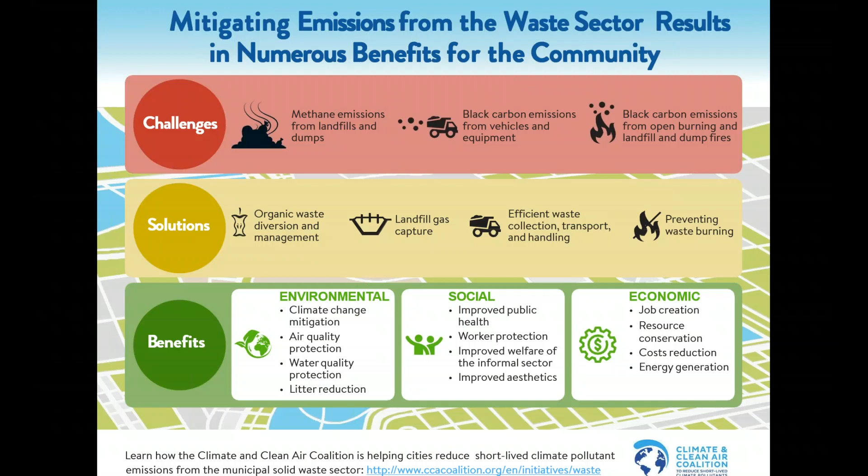One of the solutions is the diversion of waste from landfills, particularly organic waste. Organic waste can be treated to create compost or energy through anaerobic digestion. For other types of materials that cannot be recovered, waste to energy might be one way of treating them. This webinar will discuss how waste to energy fits into the circular economy and can help municipalities deal with some residuals.

Before we get started, I'd like to introduce our presenter today, Engineer Carsten Spohn. Carsten Spohn is the Managing Director of Interessengemeinschaft der thermischen Abfallbehandlungsanlagen in Deutschland, also known as ITAD. In English, the German Association of Waste-to-Energy Plants. Since 2007, ITAD represents nearly 100% of German municipal solid waste incinerators, as well as sewage sludge incinerators and refuse-derived fuel incinerators.

In this role, he is Deputy President of the Confederation of European Waste-to-Energy Plants, also known as CEWEP, and member of several CEWEP working groups. At the European level, he represents CEWEP as a member of the European Integrated Pollution Prevention and Control Bureau technical groups for the review of the best available techniques reference documents for waste incineration and for waste treatment, and is chair of CEWEP's working group Residues.

At the German level, he is a member of several working groups of the Association of German Engineers, including Working Group 3460, Emission Control, Thermal Treatment of Waste, and the National Expert Working Group KS25, Implementation of Seveso III Directive, Major Accident Directive for the waste sector. He has also presented the subject area waste to energy primarily at German and European conferences.

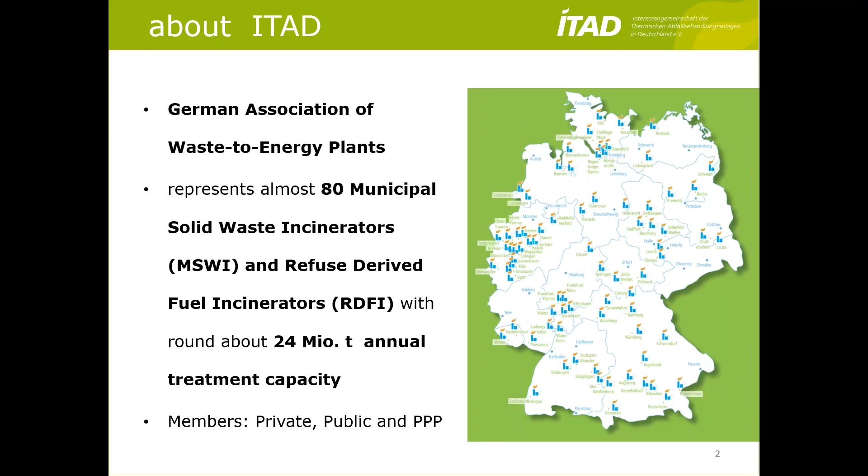There we go. Okay. Sandra already said, what is ITAD? The short introduction. We are the German Association of Waste to Energy Plants, representing around 80 municipal solid waste incinerators and refuse-derived fuel incinerators, and our annual treatment capacity is around 24 million tons. Our members are private, public, and public-private partnership companies and owners. So we represent the whole sector more or less in Germany.

So when we start to talk about waste to energy, we have to look back first to the history and maybe summarize a little bit the tasks and aims of waste to energy. So history, look back. In the Bible, incineration is already mentioned. Waste incineration in open fires around 1000 BC in Jerusalem.

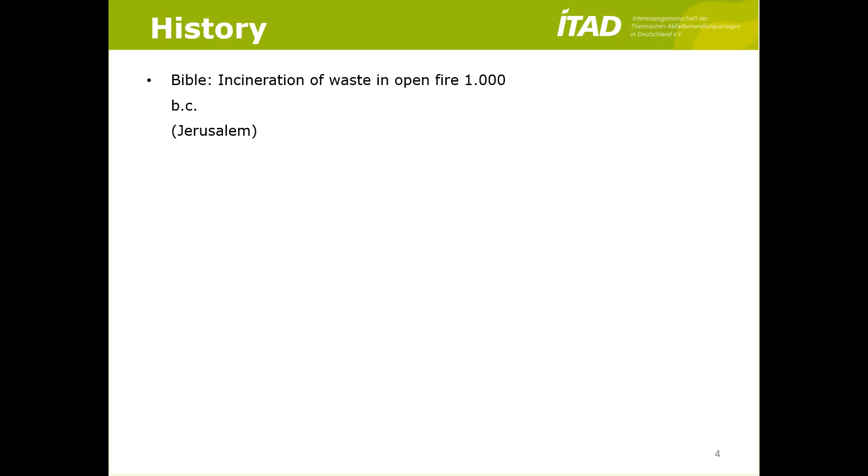And if I'm right, I remember the Old Testament already says they burned the rubbish at the banks of the Euphrates and Tigris River. So you see, waste incineration has a real long history. In the Roman Empire, the Romans also incinerated the waste. But after the downfall of the Roman Empire, waste incineration fell into oblivion.

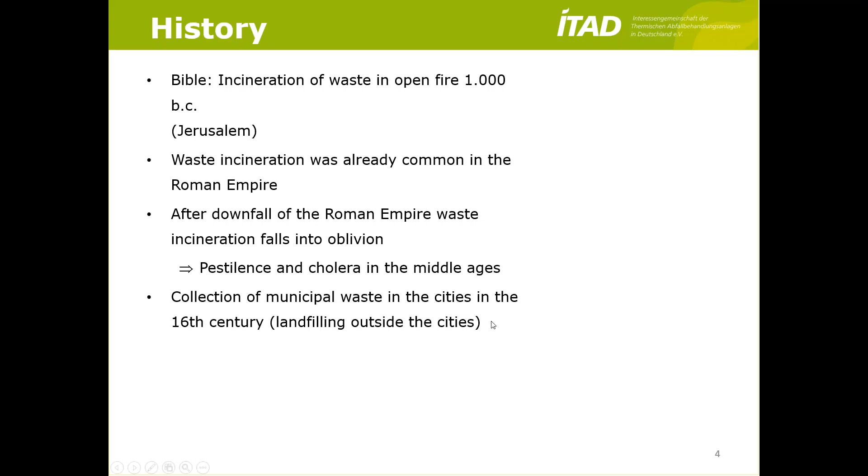And one of the results was that horrible diseases like pestilence and cholera in the Middle Ages came over Europe. So in the 16th century, the cities decided to collect the waste and to landfill it outside of the cities or use it as a compost, which was not a very good idea because they couldn't get rid of the rats and the diseases as well.

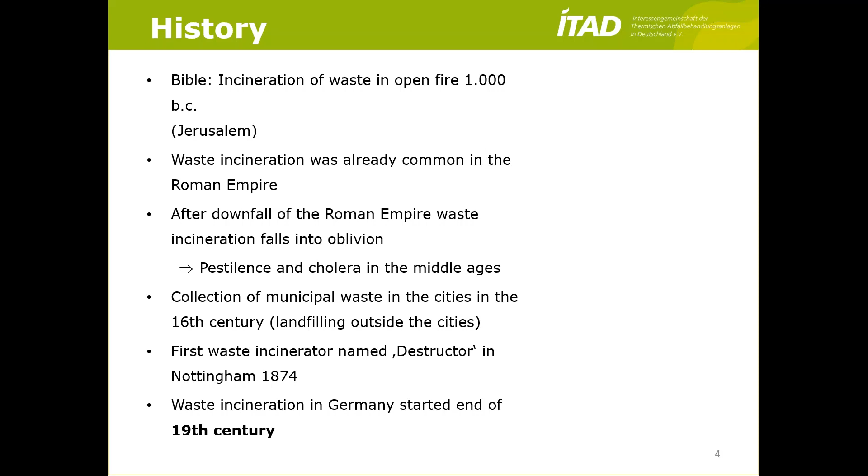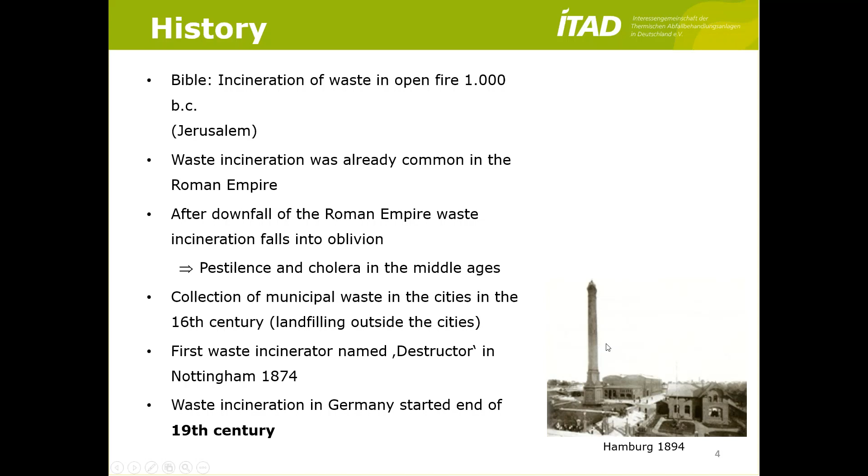And the first incinerator, with the lovely name Destructor, was built in 1874 in Nottingham, and that was the start of a more technical waste incineration, not in open fires anymore. And the first incinerator in Germany was built at the end of the 19th century, 1894 in Hamburg, with the beautiful name Bullerdeich. You see here the picture of that waste incineration plant already with the stack on the left side.

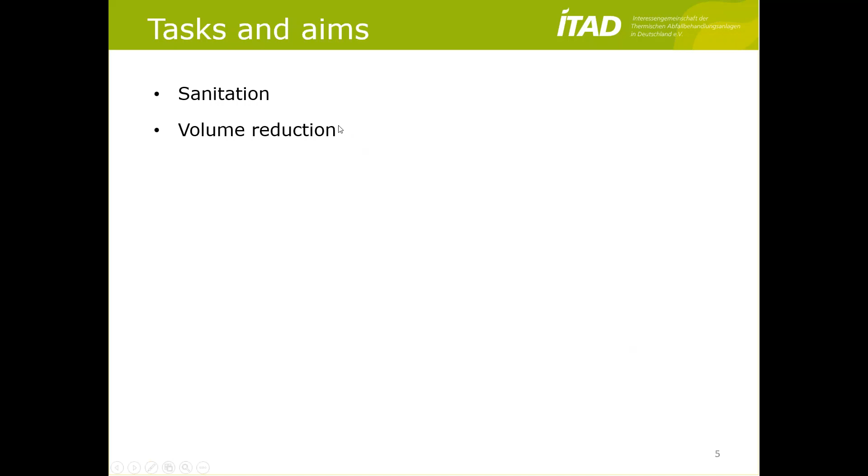What are the tasks and aims of waste to energy? Of course, sanitation. Volume reduction. People wouldn't use the landscape around the cities for landfills anymore. The long-run elimination of pollutants from the cycle of materials, a point that becomes more and more important when we're talking about increasing our recycled materials and circular economy. The minimization of emissions, clean air.

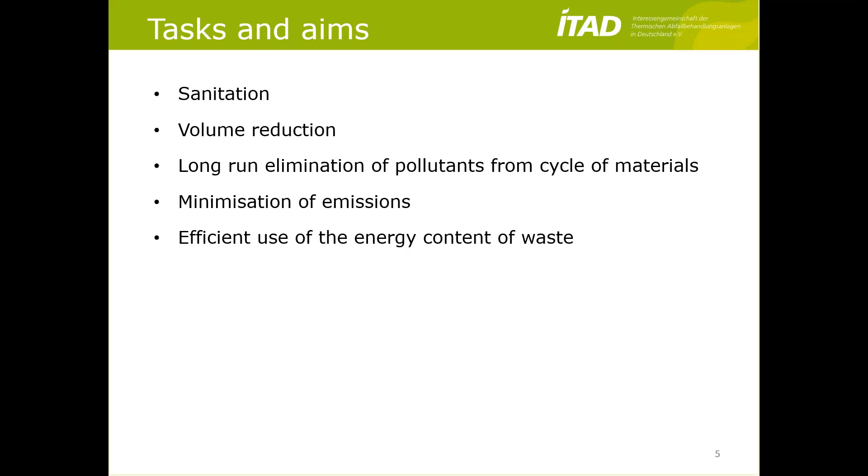Efficient use of the energy content of the waste, that is also to see in connection with the climate change and the CO2 saving potential. Substituting fossil fuels is an important point, and also the contribution to a sustainable waste management through the recovery of, e.g., the metals from bottom ash, or the reuse of bottom ash as secondary raw material used in road construction applications, noise protection walls, etc.

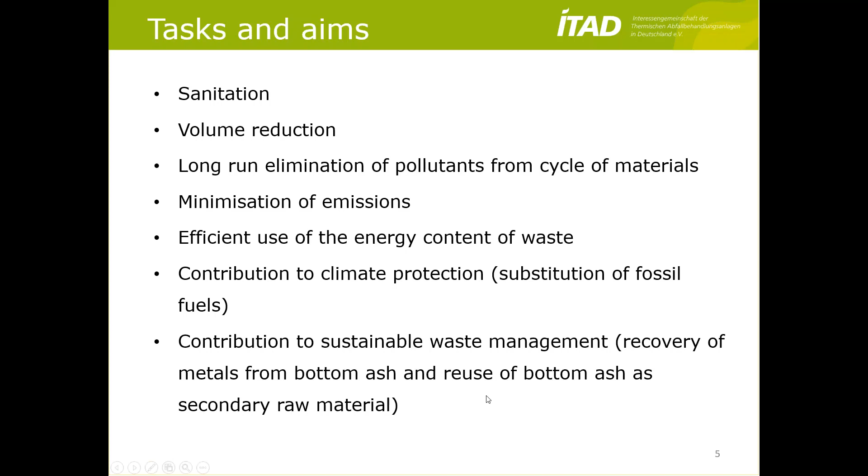How does it work? Well, here you can see the general principle, the setup of a typical waste to energy plant. You have a waste delivery and storage area. The middle part is the incineration, steam generating part. Then you have the energy recovery part, the boiler and the turbine set and generator. And then most often the biggest part of the plant, the flue gas cleaning system, or I prefer the air pollution control system.

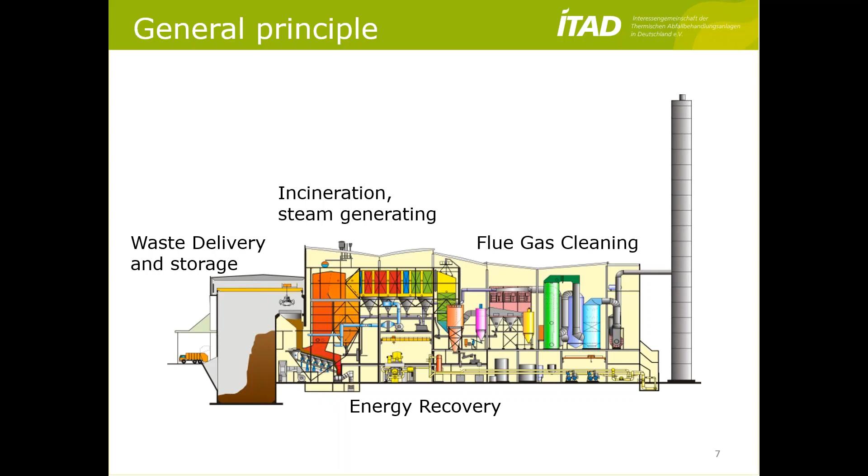Let's take a more detailed look at the incineration here with the waste storage area and the combustion chamber. This is a picture from my old plant of the waste delivery hall. You can see the trucks. We try to keep it clean to make it a nicer place, and not this typical dirty place most people think waste to energy plants are.

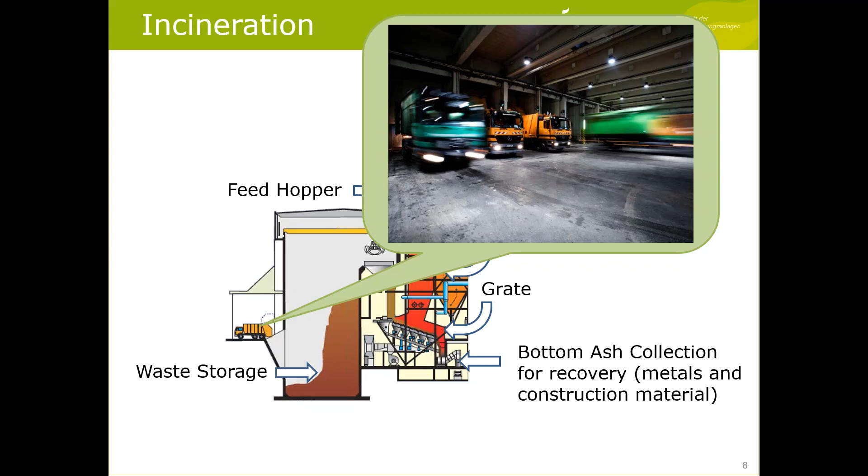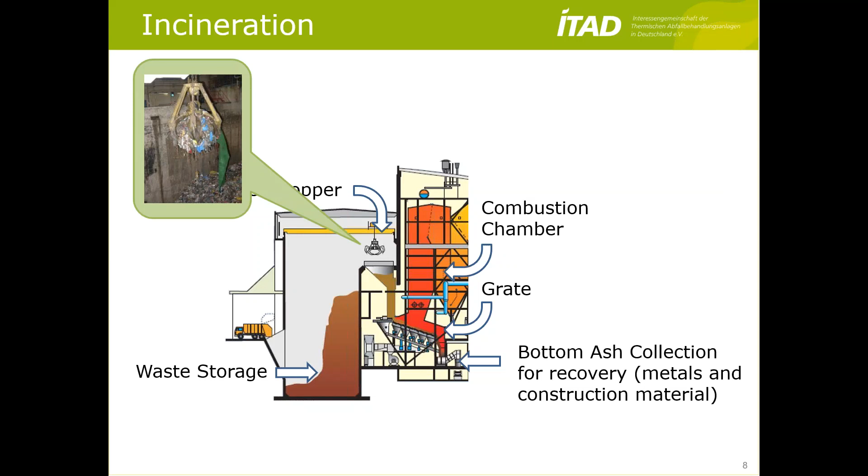Then we have, of course, the waste bunker, the storage with the cranes feeding the combustion chamber. And then you have the combustion chamber here, picture of a look through a little window on the grate. And important for the waste incineration, of course, is the input, although you cannot always see what is in. If you have the municipal dustbin, you never know what exactly is in the dustbin, but we have to define some rules about the input.

Of course, municipal waste and similar commercial waste is suitable for that. Bulky waste from households may be crushed before incineration. Demolition and construction waste, non-mineral waste, of course. Non-recyclable packaging waste. We all know that we can recycle a lot today, but there are also a lot of compound materials where the efforts we have to spend for recycling are so high that this is not really suitable at the moment for recycling.

We have sorting residues from commercial waste, but also from municipal waste, from MBTs and composting plants, all the impurities. What is not acceptable, a very important part: soil, concrete, asbestos, sand and stone, free-flowing sludges, that is not suitable for grate incineration. Bulky metal waste is not, well, metals do not burn. Self-igniting and explosive or highly flammable waste, radioactive or infectious waste.

And the most important thing, and a problem in many, many countries I visited before, is that the input is not free of non-combustible waste, and especially very wet waste, wet organic waste with a low NCV, net calorific value.

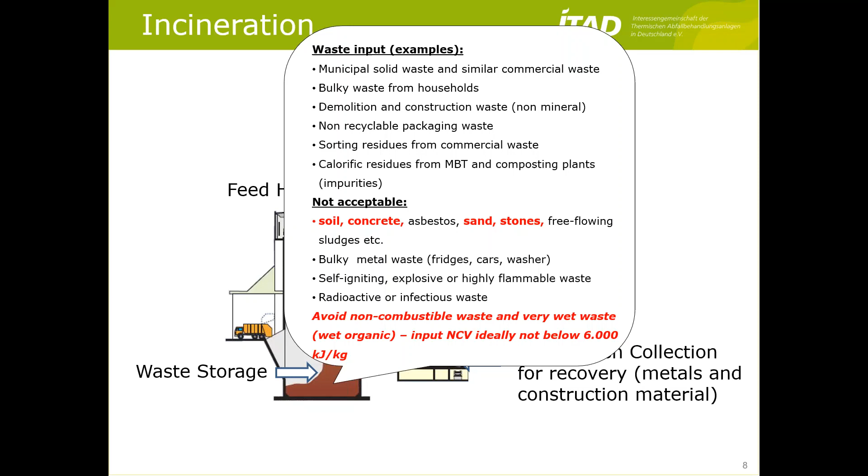Ideally, it should not be below 6,000 kilojoules per kilogram, because then you have to spend too much energy for drying or for evaporating the water content of the waste. And an old saying of a friend of mine who is the managing director of the composting organization in Germany is that potato soup doesn't burn. And I think that shows very clearly what waste to energy can incinerate and what not.

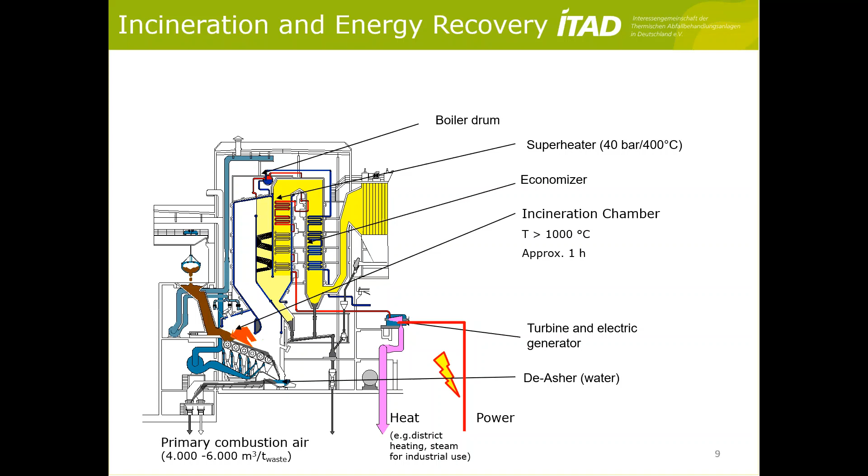And you can produce steam with standard parameters of 40 bars and 400 degrees centigrade. And after that, we can use that live steam in the turbine and generator set to produce power, or if you have an extraction condensing turbine, you can also extract heat, for example, for district heating or for industrial use. But we will see later that the options to get rid of that heat, to sell that heat, to use that heat is a quite important topic for waste to energy plants all over the world.

So the quick facts in summary: grate combustion is, from my point of view, the most proven and widely applied method to treat residual waste and recover its energy. Organic compounds contained in residual waste are safely destroyed. That's one of the tasks. The bottom ash left after incineration can be recovered. We will see later. And also the metals embedded in the residual waste can be recovered from the bottom ashes. Important task too in terms of sustainability.

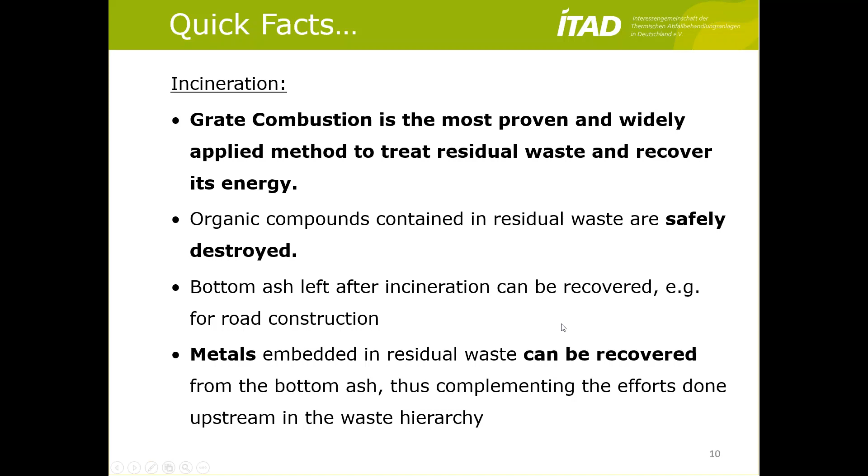Quick facts about the energy recovery. Energy from waste plants can recover more than 90% of the energy embedded in the waste input. The electricity is generated around the clock, 24 hours a day, not really 365 days a year, because we need some time to maintain the plant. So between 6 and 8 weeks, the plants are shut down for maintenance. And it's, thanks to the renewable part of the waste, a green energy or partly green energy that contributes to climate protection.

The heat recovered by a plant can be used for district heating or district cooling, although at the moment it's too expensive. We have to find better ways to use the heat to produce cooling. Industrial processes, and a very interesting thing, especially for islands or countries near to the desert, is the water desalination. We all know that water is one of the important topics worldwide.

And for example, we have a very little waste to energy plant in the Caribbean, Saint Bartholomew, where we produce with a little amount of waste, around about 12 or 13,000 tons a year only, very good quality potable water. So there are many other purposes for energy use of waste to energy plants, but we have to find the right place for those plants worldwide.

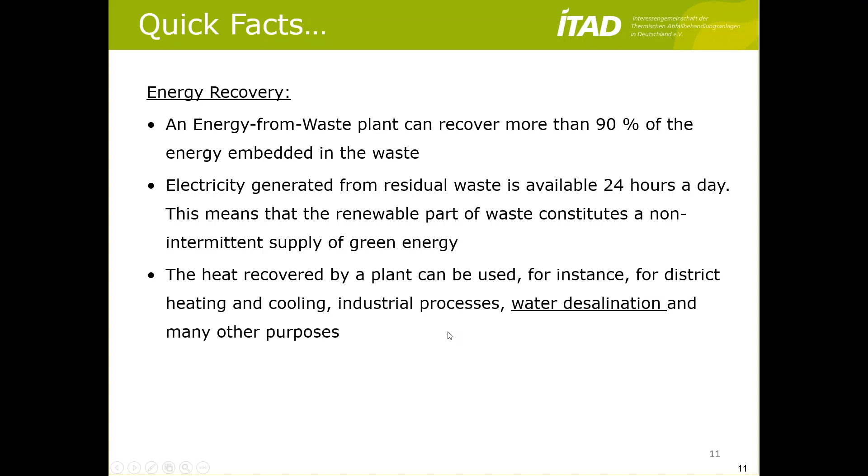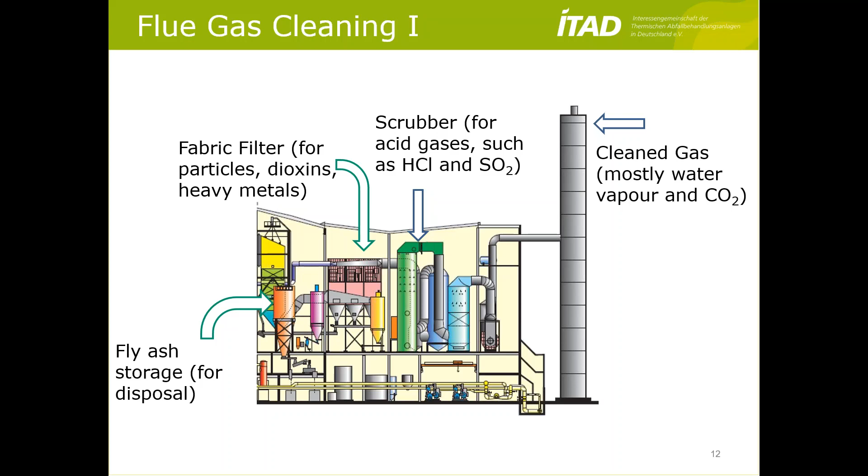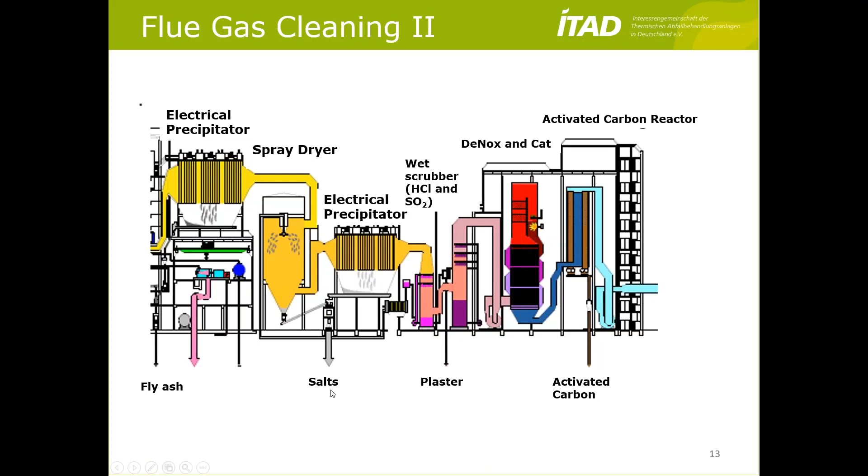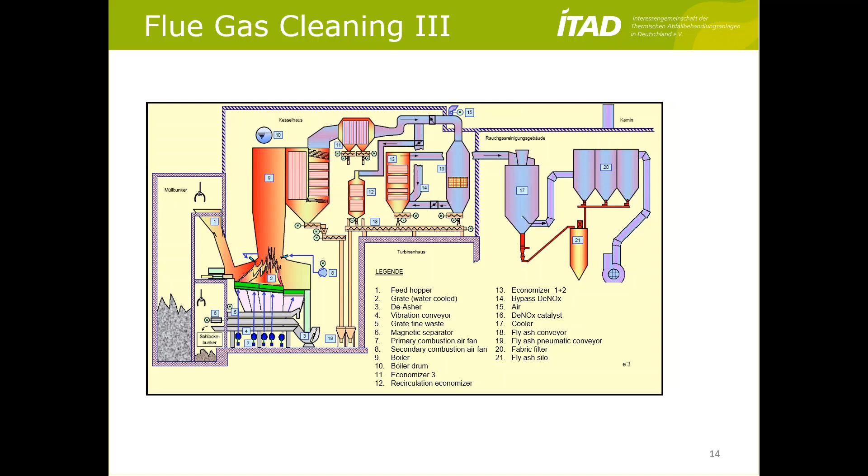So flue gas cleaning, a quick overview about different setups, small setups or more compact setups like this one here, or a very comprehensive setup with a lot of aggregates, with a lot of treatment steps of the flue gas cleaning or air pollution control with the residues produced here. And another setup, a bit simpler one, but as efficient as the other ones. And they all together produce a very similar set of emissions. And this set of emissions is set here.

You can see the pollutants in the left row. You see the German limits from our ordinance on the emissions of waste incineration plants, and you see the operational data as an average of the half-hourly average values. And in the graph below, you can see the percentage of the ELV used on an annual basis, and you see that most of the parameters are used only 20% or less, significantly less than 20% of the emission limit values.

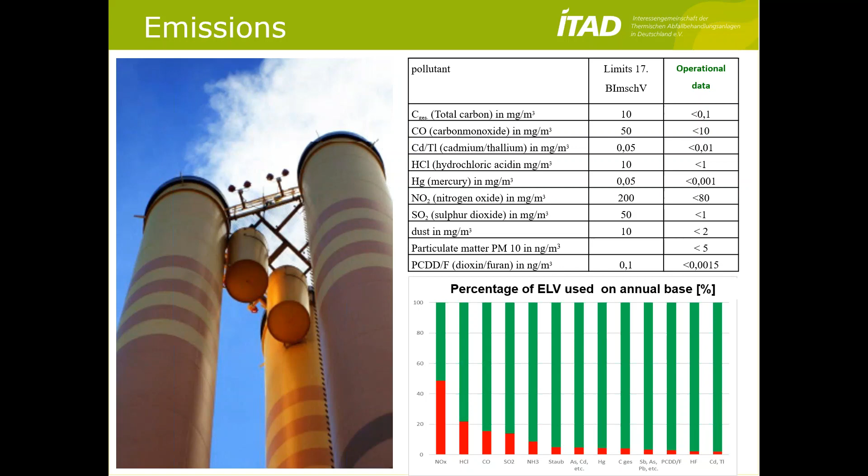The only exemption is the NOx, which can be influenced by the flue gas cleaning system itself. If you have a catalyst, the DeNOx system, it depends on the urea you insert into the flue gas stream to influence that value. So, quick facts about the flue gas cleaning system. Emission limits for waste to energy ones are the most stringent in Europe from the whole combustion industry, and the emissions are more or less irrelevant compared to other sources.

That's also what one of our ministers for the environment said, and he was a green minister from the Green Party, and we made a study in 2005, and as dioxins and furans were many years in the public discussion, he said dioxins emitted from waste to energy plants are not an issue anymore.

So we have mandatory technology for heavy metal removal, and that guarantees, especially for mercury, which is also in the focus of the Minamata protocol, a safe removal from the ecocycle, safe storage, for example, in hazardous landfills. We will see that if we come to the residues from waste to energy plants.

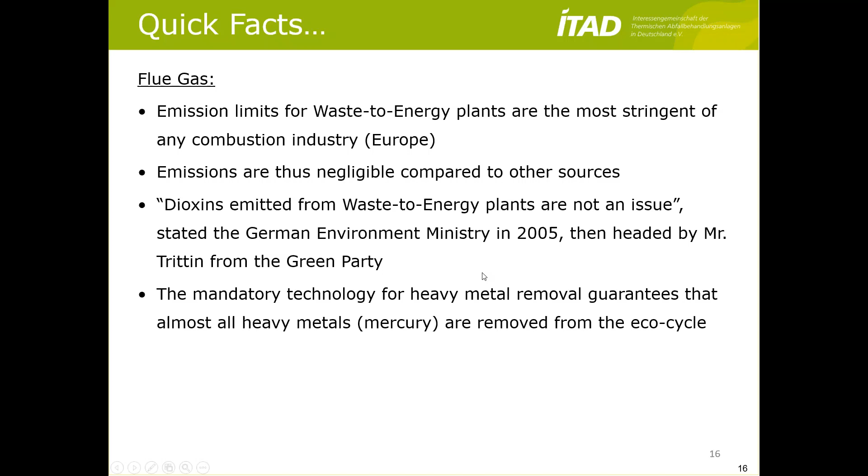There we go. Here are the residues in a quick overview. Again, I don't want to go too deep into the details, but we can see that from 1 ton of waste, we produce round about 400 kilograms of residues. Most of it are the bottom ashes, 200, 220, 250 kilograms in Germany, depending on the waste input composition, some boiler ash, some solid APC, air pollution control residues.

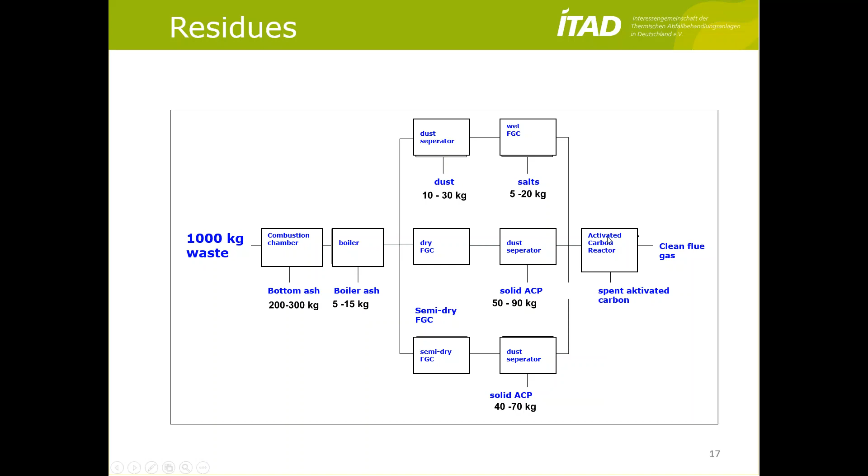Sorry for that mistyping. Sometimes you have a kind of police filter at the end of the APC, which is fed with activated carbon. So what can we do? We have, at least in Germany, a very safe disposal and recovery of the APC residues and the bottom ash in an environmentally sound way. For example, we use the APCs to stabilize our salt mines.

On the other hand, other European countries have dedicated hazardous landfill sites where they landfill the stabilized residues from waste incineration. We separate and recover the metals from the bottom ashes. Almost 1% of our recycling rate in Germany comes from the metals recycled from bottom ashes. And also the mineral part of the bottom ashes can be used as secondary raw material.

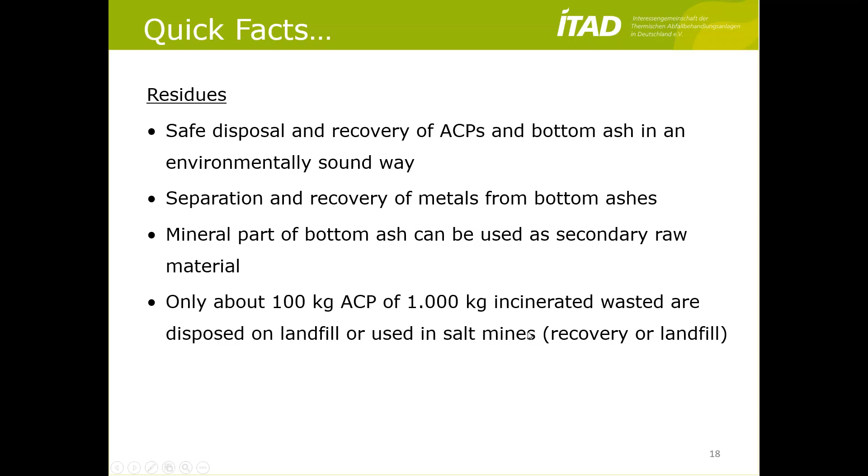Yes, only 100 kilograms of the residues are landfilled. That's what I said before. And as we have these salt mines that have to be stabilized, it's also classified as recovery, but that's a specific issue in Germany.

So when we talk about waste to energy, of course, we also have to talk about economic key data. I would say that the economic efficiency depends, of course, on the capacity, and the minimum of 50,000 tons per year should guarantee a kind of economic efficiency. But as I said before, in very specific conditions, e.g. on a small island with the need for water desalination, that can be also less than 50,000 tons. The technology installed is quite important.

The infrastructural requirements: near to the waste production, to the cities, not the old German strategy, build it far away from the city because people don't want to see an ugly waste to energy plant. That was one of the mistakes we made in Germany, and now we sometimes have the problem to connect waste to energy plants to the heat grid. With the power, it's not a major problem, but with the heat, it could be quite problematic and quite cost intensive. You need a logistic connection for trucks, railway, maybe ship, depending where you are.

Near to energy consumers, you need a sufficient supply of waste, of course, without overcapacity, something that was discussed very intensively in Germany. And you can believe me, with 24, 25 million tons of capacity, of course, the recycling industry claims that waste to energy possibly can hamper recycling. But that's a topic for the second part of the presentation.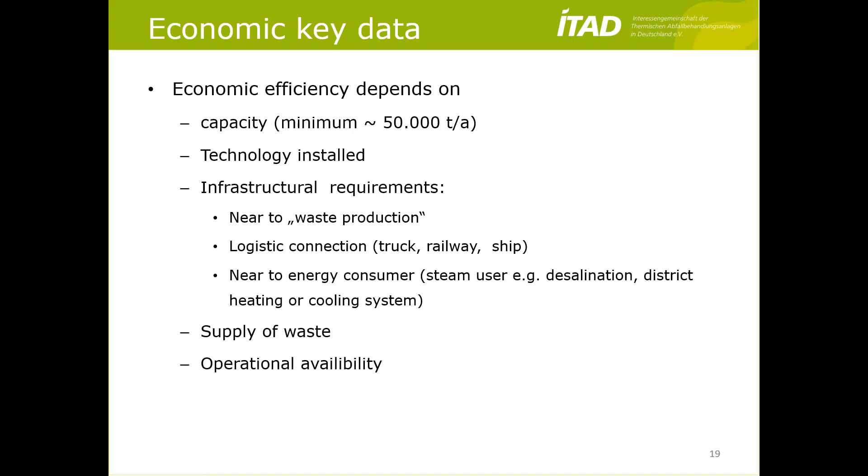So here are some basic conditions, just roughly for you. You can check that afterwards, and also compared costs for building, investment costs. In Europe, per ton of waste, 500 to 650, let me say for state-of-the-art new waste to energy plants, considering 15 to 20 years in operation. Worldwide, I'm fully aware that the cost can differ significantly. I was in India, for example, where I see that the investment costs are at the lower end, maybe 100 to 150 euros per ton of annual capacity. So these costs have to be calculated very specifically for the country you want to build the waste to energy plant.

You have maintenance costs, which are more or less between 3 and 5% of your investment costs. Not to forget treatment costs, but these treatment costs also vary with the salary in your country, with the treatment costs or landfill costs for the residues, with your feed-in tariffs for power. So it's very difficult to give here a clear number or a range of the treatment costs, but they are there.

It's not for free, that's clear. You need maybe 40 to 60 employees for a big waste to energy plant. That's if you have a more or less automatic control system. I saw waste to energy plants in India and also in China which have significantly more employees than these 40 to 60. You need space for a waste to energy plant, and a rough estimation for a big waste to energy plant for 5 lines with 150,000 tons of annual capacity, it's maybe 80,000 square meters.

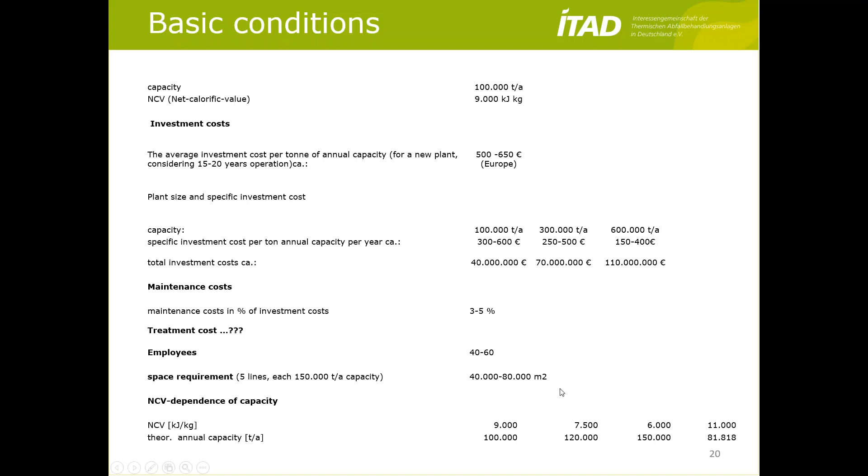And also the net calorific value will influence your capacity. With a low calorific value of, for example, 7,500 or 6,000 kilojoules per kilogram, a 100,000 tons at 9,000 kilojoules per kilogram plant will have significantly more capacity. It's 120,000 tons, because the limit is always the energy input in your incineration chamber, in your combustion chamber. So if the net calorific value is lower, the capacity will increase. If the net calorific value increases, your capacity will decrease. That's for sure. That's a thermodynamic rule, and waste to energy plants have to follow that rule, of course.

But the important message from this slide is that zero gate fee, which I really hear quite often, is really a myth. Of course, there are countries where the feed-in tariffs for power are so high, with some subsidies in the background, that at the end of the day they can compensate the costs of treatment, but then it's a zero gate fee subsidized by other things. But waste to energy costs money, that is clear, and that is a message that has to be told to people outside a waste to energy plant.

I remember some municipalities, for example in India again, where we had very hard discussions about the zero gate fee policy, and we compared it a little bit to wastewater treatment in India, where at the beginning it was almost impossible to introduce a treatment fee for wastewater, but today there are treatment fees paid by the municipalities, and maybe that's the way we can deal with the gate fees for a proper waste to energy plant.

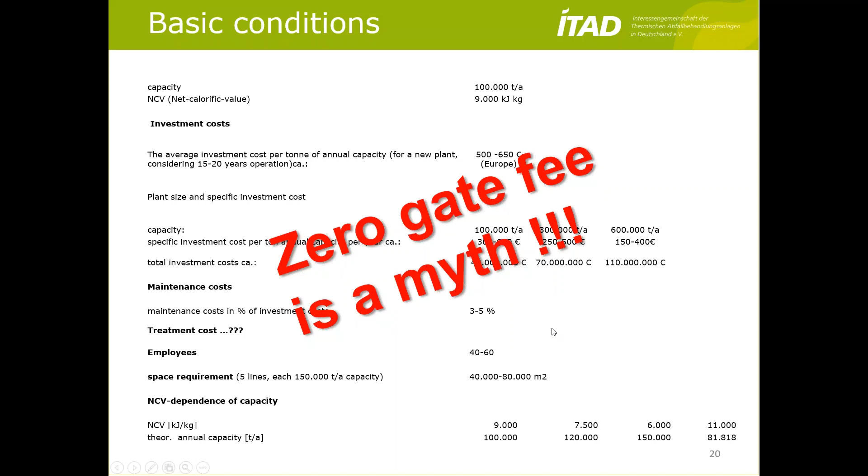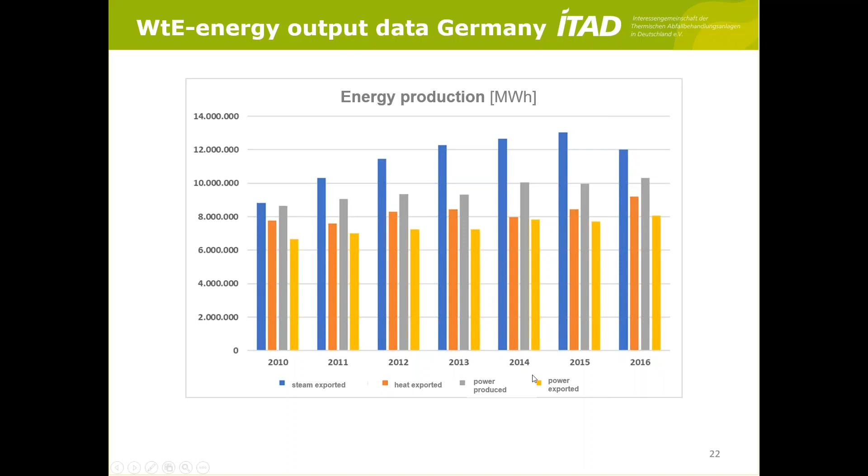So energy efficiency and climate protection potential, that's the second aim of the Climate and Clean Air Coalition, climate protection. This is, for example, the energy production in Germany. You see it differs a little bit between heat and power, depending on how much heat you can sell and how warm or cold the winter was, but the total energy produced in Germany in the last years has increased a little bit.

And if we calculate the greenhouse gas savings from that, you see, of course, there is a burden. 1 ton of waste creates 1 ton of CO2. Roughly half of it, or less than half of it, is fossil content. So at the end of the day, the specific emissions are almost 400 kilograms per ton of waste. So 9 million tons on the burden side. But you also generate credits.

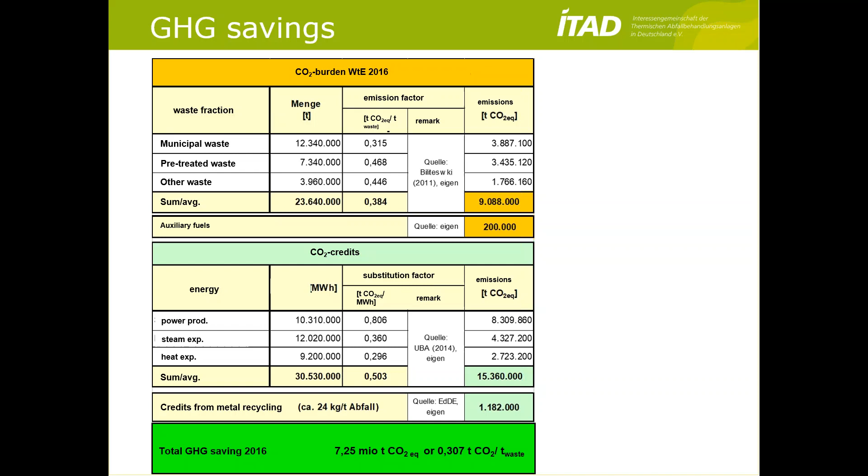In Germany, we still have some coal-fired and gas-fired power plants, and if you calculate the CO2 credits using the substitution factors, you see that at the end of the day the German waste to energy sector saves 7.25 million tons of CO2 just by substituting fossil energy sources in our country. This is quite a lot, but not as much as we save in another direction. Sorry, I missed that.

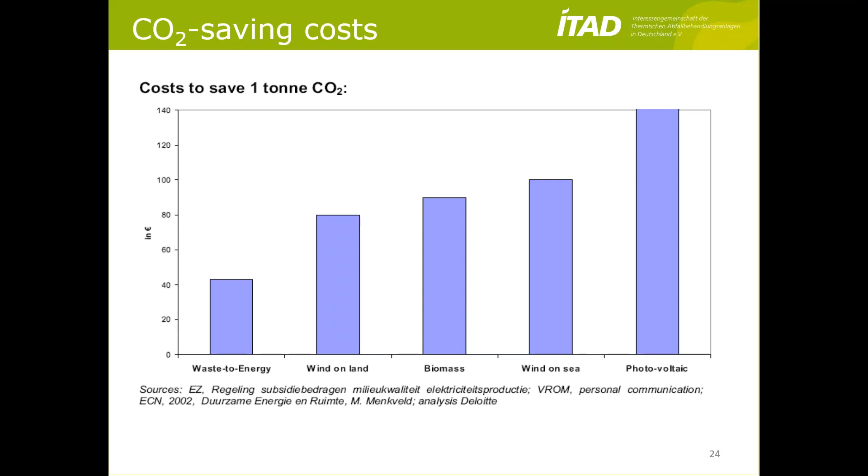We also calculated, and not only we, it's coming from the Dutch Ministry of the Environment. We compared the specific costs for saving 1 ton of carbon dioxide, and you see that waste to energy has by far the lowest specific CO2 saving costs. But another point is quite important. That's what Sandra said in her introduction.

If you want to get rid of your landfill and replace it with an efficient waste to energy plant, you can see that the amount of CO2 emissions you can save, from methane, which is 25 times more dangerous for the climate than CO2, is really huge. If you replace an old existing waste to energy plant with a new efficient plant, there is still a benefit for the environment, but replacing landfill is really a huge one. You can save almost 700 kilograms of CO2 per ton of waste if you replace that, and that for years.

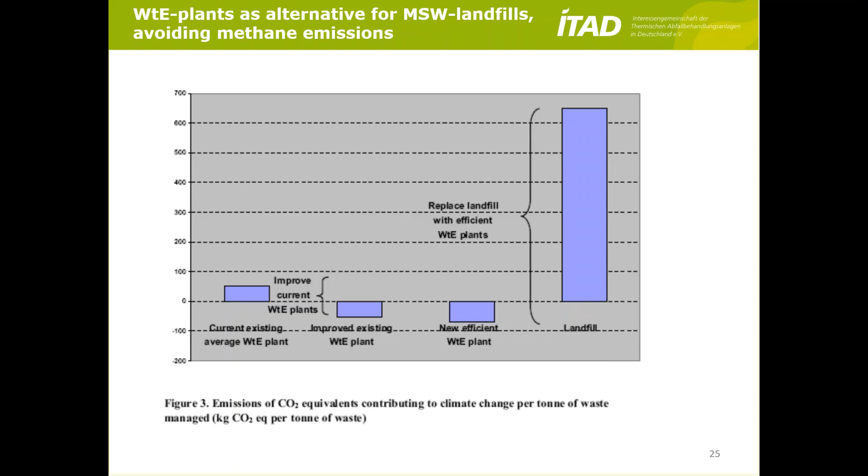And that's the reason why, for example, in Germany, the waste management sector was one of the first big contributors to climate protection. So quick facts again: energy from waste is about 50% renewable. Thanks to the substitution of fossil fuels, we have a nice economic and ecological effect by saving CO2 emissions.

Most benefit comes from the methane mitigation. If replacing landfill, CO2 avoidance costs are low. And also interesting, there are some tools in the ETS. I was always a fan of this clean development mechanism.

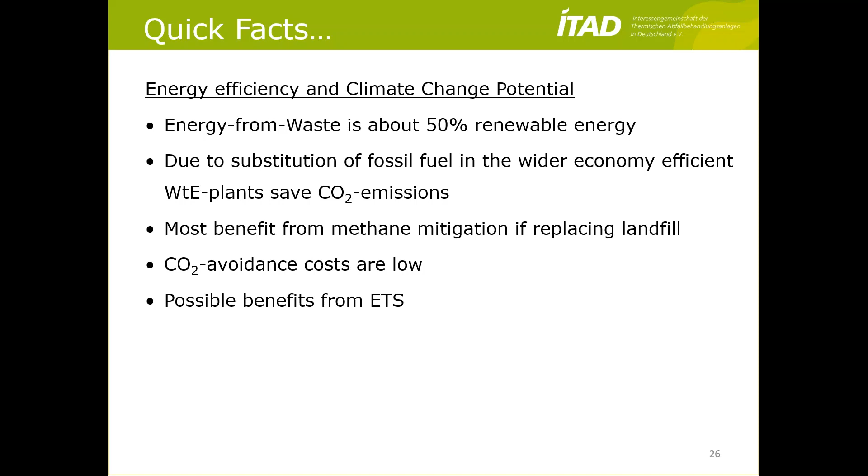Unfortunately, we failed to have an agreement with the part of our EPA that we can help some countries with those CDM projects, because till today, the waste to energy projects are not really very popular. Let me say popular is maybe the right expression for that. So something we can work on.

Okay, it was not a very quick, but that was the overview about the technical background. What is waste to energy? How does it work? What are the benefits? What are the emissions? And now let's come to the waste to energy role in the circular economy.

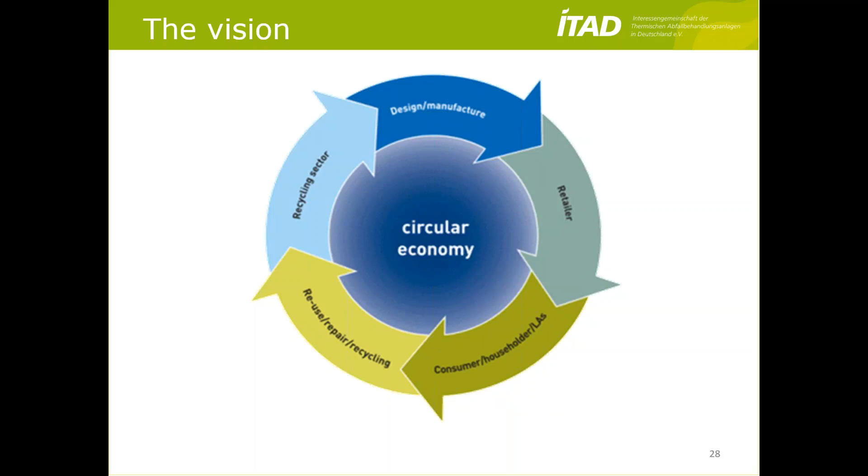Let me start with the vision. And I think it's very important to have visions, because that is our aim. This is what we can ideally reach if we really live with the rules of circular economy. But this is a vision. I think that no one believes that we will reach this circle one day with 100% having materials in that circular economy, because reality looks a bit different.

Of course, we need energy and raw materials to design, to manufacture products, to distribute them, but then there is a first side stream that goes into the anthropogenic deposit. For example, in buildings, materials, not waste, materials stay maybe 20, 30, 40, 50, 60 years in buildings, technical buildings, before they come back as waste someday. And so they cannot be substituted in an endless circle in the next years. So you have to replace them by maybe raw materials. On the other hand, you can substitute some parts, of course, by recyclates.

You have the collection and the recycling, but there are a lot of unwanted substances in the recycling scheme, in the recycling sorting plants, the rejects, unwanted materials coming from chemical legislation, things like POPs, for example, heavy metals. So they have to be sorted out.

And for those materials, we have the waste to energy, and waste to energy not only in terms of municipal solid waste incineration, it's also about co-incineration in cement kilns, maybe coal-fired power plants, not the sector of the future in Germany, but they also contribute to that reality in the waste to energy sector in Germany. And of course, you need also hazardous waste incinerators for very specific highly polluted waste or infectious waste.

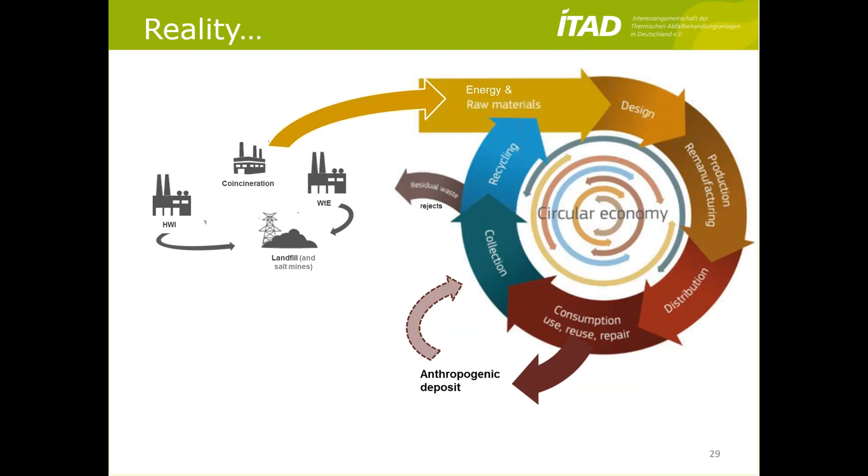We need our liver, we need our kidney, and maybe the liver is the better example because the liver is on the one hand cleaning our blood, on the other hand producing a lot of energy for our body. So maybe our business is a little bit the liver of the circular economy, so it's a basic pillar of it. That circular economy and also the pollutant sink waste to energy is not easy to achieve. You can see that on that graph.

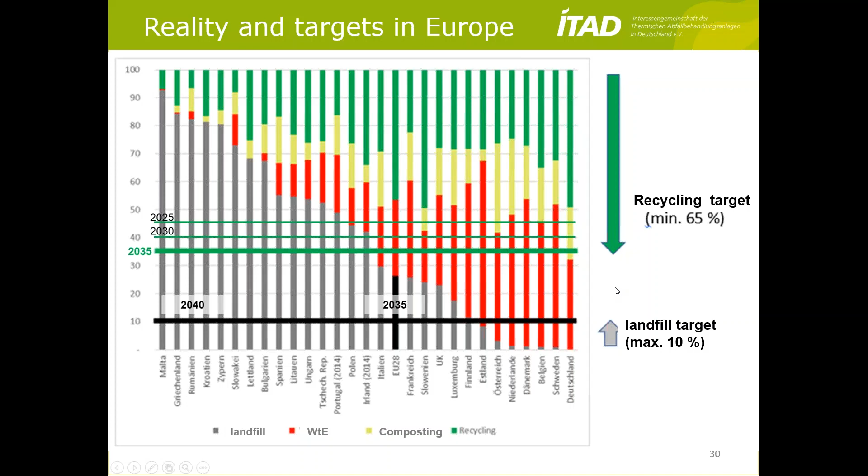So another important thing is the maximum landfill target in 2035. Only 10% of the municipal waste should be landfilled. And for some countries with less developed waste management systems by now, which are Malta, Greece, Romania, Croatia, and Cyprus, they are allowed to fulfill that target in 2040. It's a very important task, but it's also a long time to go, and we still have to spend a lot of effort to reach those targets in Europe.

So, quick facts on waste to energy's role in the circular economy. Thermal waste treatment is a cornerstone of the waste management industry and an integral part of sustainable resource management. That's what I showed with the reality of the circular economy graph. I think that hopefully is clear. Waste to energy acts as a pollutant sink. It guarantees an environmentally sound and long-term disposal security, also important.

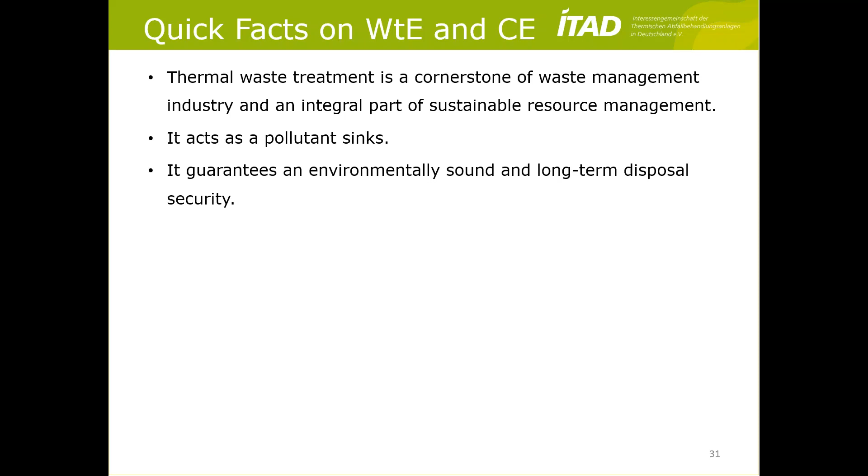Some of you might have seen the pictures of waste stored in the streets of Naples and the south of Italy, or the pictures of Lebanon where the waste is stored 3, 4, 5 meters high in the cities because the landfills are not able to accept the waste anymore. This is also a very important task, and it should be payable for the citizens.

It's a sustainable contribution to resource efficiency through thermal recycling. That is something that was discussed intensively in Germany, if this is really recycling. But of course, it's a kind of recycling. It's not true recycling, no material recovery, but energy recovery and some material recovery. I told you about the metal separation from bottom ashes and slags, and the production of high quality granulates that can be used in applications outside landfills, road construction, noise protection walls, other walls. So it's the combination of both, and that's the reason why we call it thermal recycling.

And the resource waste, and that's, I think, the important message, can only be used efficiently and sustainably if all treatment options, material recycling, energy recovery, and landfill are properly combined based on a proper segregation of waste at source, because every different treatment step needs specific input criteria, input quality, and the easiest way to achieve that is to keep your different waste streams, for example, the biodegradable waste, separated at source.

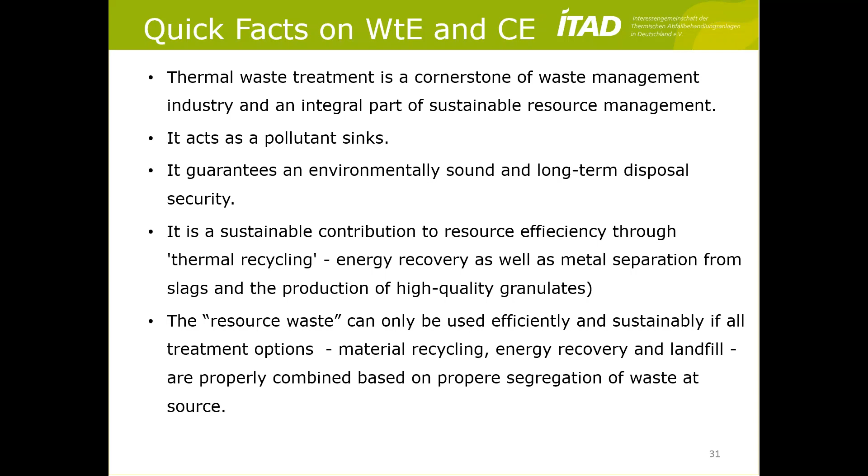So, but how to establish it? That is not so easy. We saw it in India. We had discussions in China, in Malta, also in Eastern Europe, even today in Southern Europe, in Italy, in Spain, in Portugal, south of France. Still in Germany, if you want to build new plants or replace old plants by new lines. Well, of course, in countries with a less developed waste management system or technical waste management equipment today, a proper waste segregation is important. A safe and reliable collection is important.

We saw that in some countries of the world, municipalities are responsible for collecting the waste with some kind of municipal transfer stations, but from then some private companies are responsible for delivering the waste to the waste-to-energy plant. Unfortunately, those companies are paid by weight, and so the best option to raise the weight and to earn some more money is to put some water, some stones, and some sand and mix it with the residual waste.

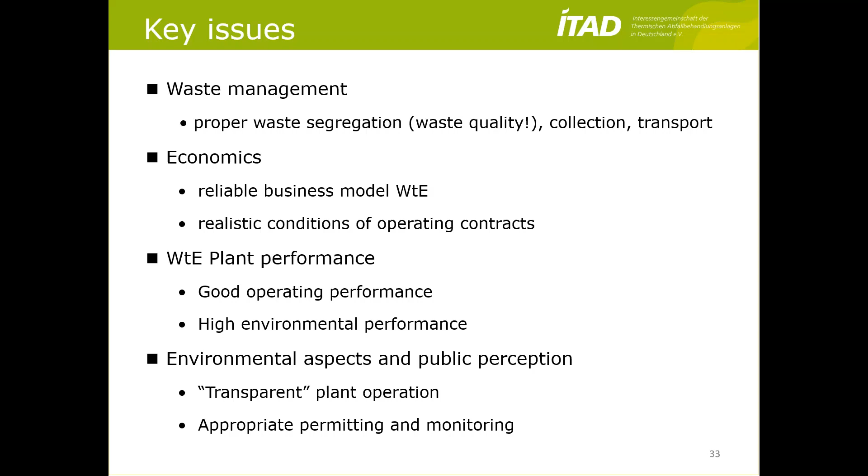So what are the strategies for implementing waste to energy? Segregation of waste at source is essential. That's what I said before. Maybe in some specific cases in parts of the world where you have dry and rain seasons, pre-treatment, pre-drying if necessary to meet the design quality of the municipal solid waste incinerator, and avoid the deterioration of long-term capital investment. That is very important. If you have no money, you will lose your whole investment.

We saw waste-to-energy plants after 2 years of operation where the investment costs are almost lost because the plants are in such a bad shape, because no one spent even 1 pence on maintenance. So maintenance and replacement strategy: 25 years of operation is an aim. It's maybe not easy to reach in every region of the world, but it should be at least 15 or 20 years.

Establish transparent emission measurement systems, CEMS, continuous measurement at all times, and convince the public by publishing the environmental performance. A regular and stringent monitoring of the plants, that's what I said before, also to increase public acceptance.

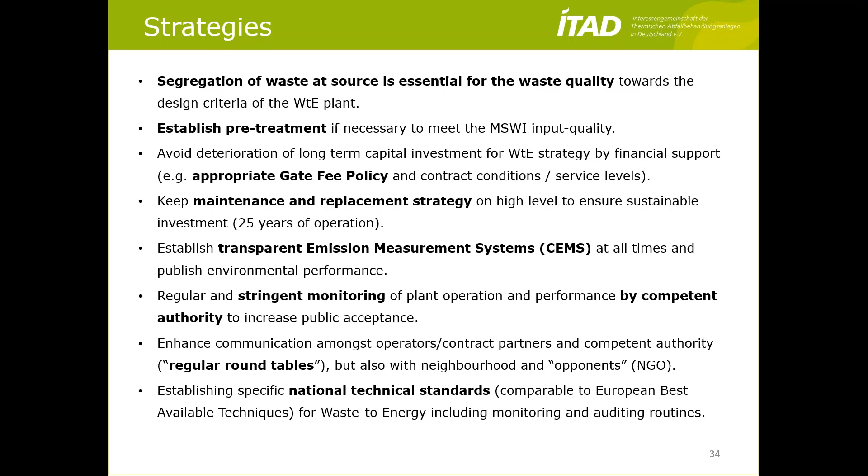In Europe, we have the best available techniques, the BREF documents, revised every 8 years, and then they have to be implemented into national legislation in the next 4 years. Including monitoring and auditing routines, I think that is also quite important to convince people that these waste-to-energy plants are not only performing well, they are also monitored very well.

The last point are the barriers. I think that is also nothing new. You have, compared to landfills, high investment costs. Quite often you are missing energy users, especially for heat, but also power can be a problem.

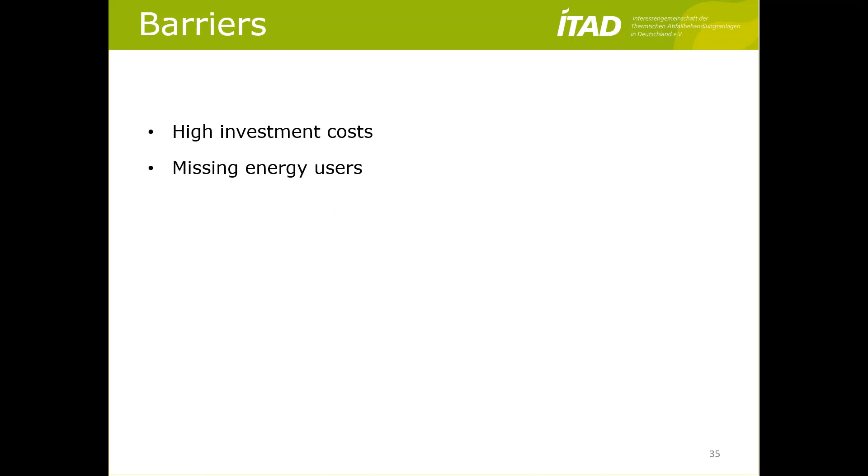I talked to friends in Ireland operating a waste-to-energy plant, and they said, yes, well, when the wind is blowing and the sun is shining, we have so much renewable energy in the grid that we are not allowed to export power to the grid anymore. So we have to switch off our turbine. Unfortunately, we have no possibility to use the heat at the moment, so we're desperately looking for a heat sink, heat users in Ireland. Public acceptance, I said that before.

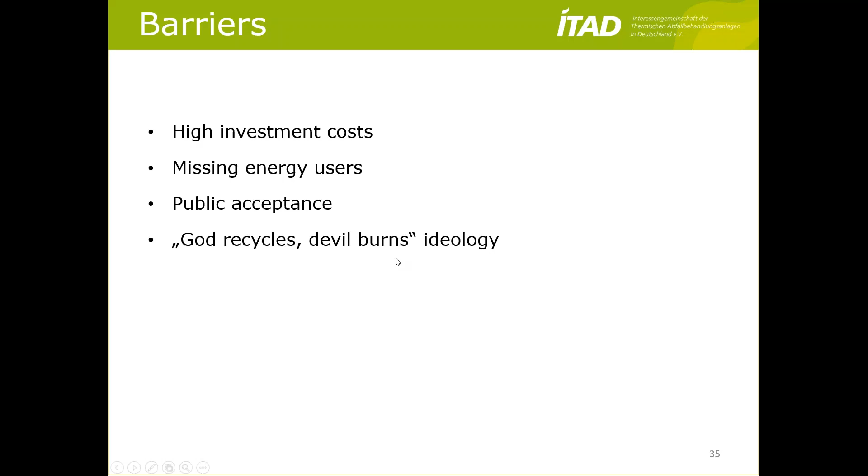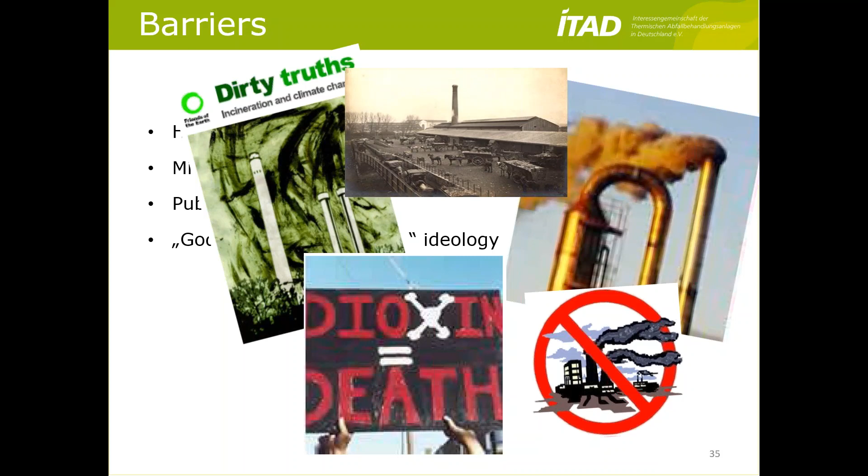The "God Recycles, Devil Burns" ideology is, unfortunately, still common in many parts of the world and in many NGOs. These are pictures of that ideology. You see dirty, ugly plants with a lot of black smoke coming out. Although most of these pictures are not really of a waste-to-energy plant, this ideology will be fed by those pictures.

So the best thing we can do is have transparency from the start of the project, from the planning phase through the permitting phase, the building phase, and the operational phase. Active communication with your neighbors, your residents, your local authorities, with the politicians is very, very important. And especially politicians, they listen to the people of your neighborhood. And so you should listen to those people too.

Take their fears and worries, listen to them, and find ways to convince them that these fears are maybe a little bit old-fashioned, that waste to energy is clean, is safe.

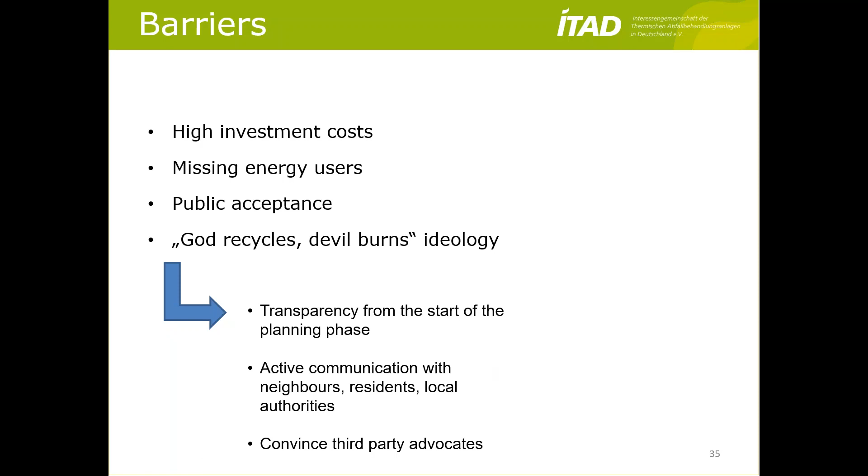And one very important thing are third-party advocates: people present in the public, lawyers, doctors, politicians, whatever, prominent people, some VIPs, whoever you can find, who are convinced that waste to energy can help. You need people that other people trust, and so that can help a little bit.

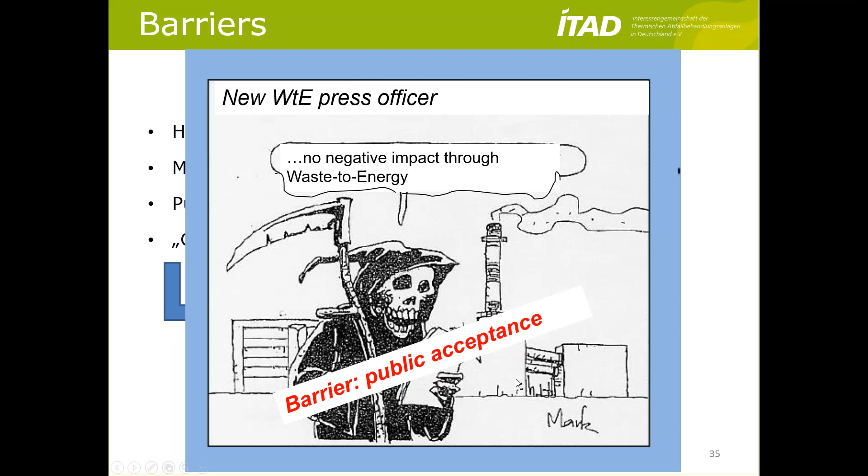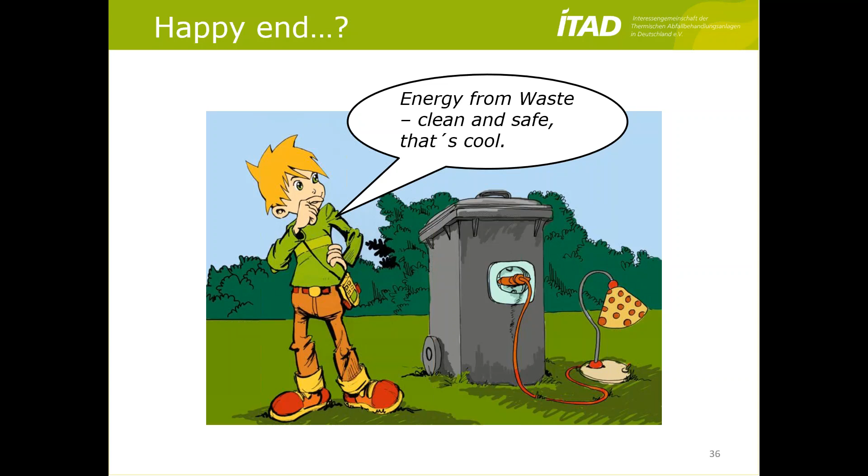But at the end of the day, we hope that we can convince people that energy from waste is clean, safe, and maybe it's a little bit cool also for the kids, that they can see that waste that cannot be recycled can be used to produce energy or power. And as a symbol, you can see here the power plug in the waste bin. I think it's a nice idea, because that is how people can understand what waste to energy really does today.

And yeah, we think that the old CEWEP slogan, waste to energy and recycling go hand in hand, is the important message that we try to distribute all over the world. Waste to energy does not hamper recycling. We are the pollutant sink, and that's our role in the circular economy. Thanks again.